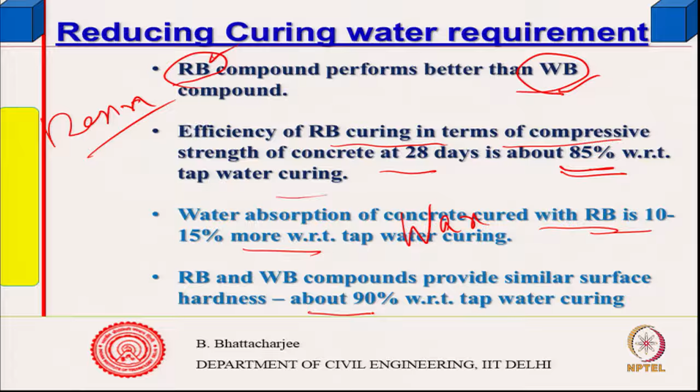Water absorption of concrete with resin based curing is 10 to 15% more with respect to tap water curing, and wax based compound provides good surface hardness, because locally the water cement ratio, the water tends not to evaporate out, it is contained at the boundary, but this is already after setting. So the overall water cement ratio or structure change is not occurring, and generally the surface is improved significantly if you use this kind of treatment.

One thing one must see, these are something like additions, these are the kind of material which you see. Now there is one more thing you should see.

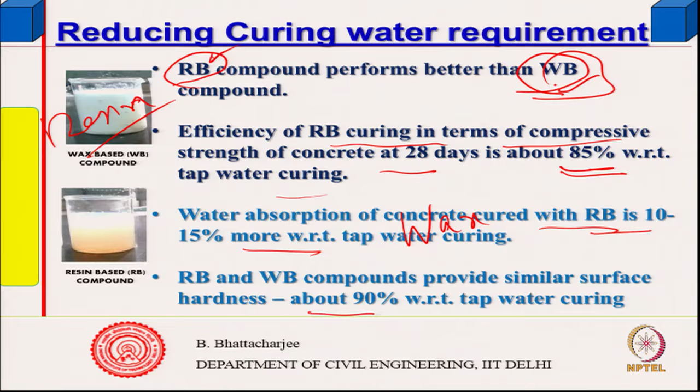When you are using this, you must see that it is able to withstand the ambient temperature. For example, in summer time, in tropical climates, even in a climate like Delhi's, which is called composite monsoon climate, we have some time of the year absolutely dry, then some time with rainfall, and then winter. During the dry period the temperature goes up to about 40-45 degrees centigrade, and if radiation is falling onto the surface, it might increase by another 15 degrees centigrade, because direct radiation means direct energy coming in. So if you touch the surface, it will be hotter than the air temperature.

Under such situations, these compounds must be stable. Wax can melt away, simply peel away from the surface if it is exposed to sunlight and hot air. So in May, June, one has to be careful, and in climates like a desert one has to be careful, but in a desert water is not available anyway. So you have to design the system appropriately and choose the right kind of compound.

Treated domestic effluent gives you another advantage, that is reuse of the water that is available. So for both concrete mixing and curing, you can use treated domestic water.

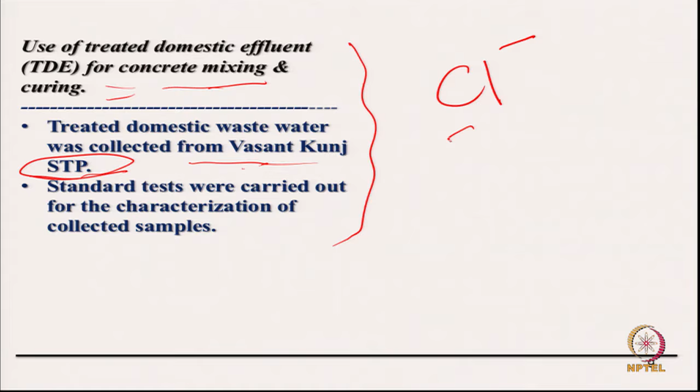Drinking water, potable water, is not necessary for concreting. The human body gets affected by bacteria, and small quantities of bacteria do not affect the concrete, but concrete is affected by SO3, SO4, etc., or particulate matter.

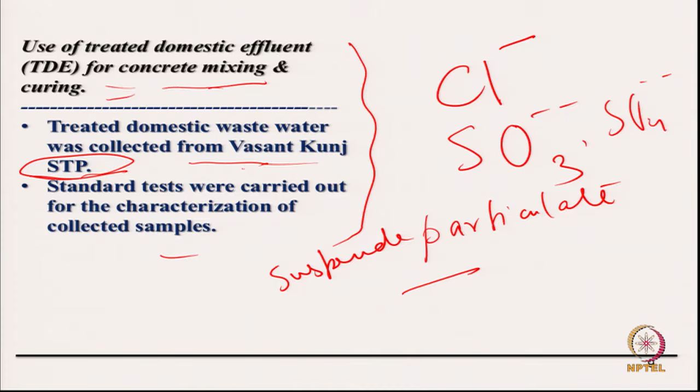Suspended particulate matter, and these are given in standards, whether you take American Society of Testing Materials, Indian standard, or any standard, you will get this standard. So first you have to test whether they satisfy those requirements or not.

If you test them, just as a comparison in a particular case, the parameters are total solids, suspended matter, inorganic solid, organic solid, pH. These are all in milligrams per liter as shown. This is an example, similar things could be there elsewhere: total alkalinity, total acidity, chloride concentration, sulphate concentration.

And the total solid should be less than a limit available as far as ASTM is concerned. This is just an example, but that is not important. The TDS limit is something like 50,000 milligrams per liter, it should be less than that.

Now, chloride content is given by IS 456, BSEN, ASTM, everybody gives this chloride content, and 500 milligram per liter is one of the limits. You will find ASTM C1602, BSEN 1008, and IS 456 of course gives you limits. So you have to see whatever code you are using, it must satisfy those limits.

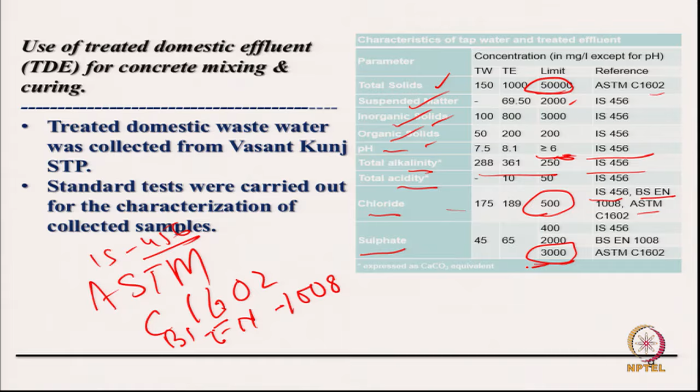Similarly, sulphates are the other one. These values are again given, and they are not all same; different codes have different values. So it must satisfy this requirement, and once satisfied, the test has been done. For example, this is a manually collected scenario, and one can collect this. So the standards are ASTM 1602, BSEN 1008, and Indian standard 456 - American, European and Indian respectively. You can look into this and they must satisfy these requirements.

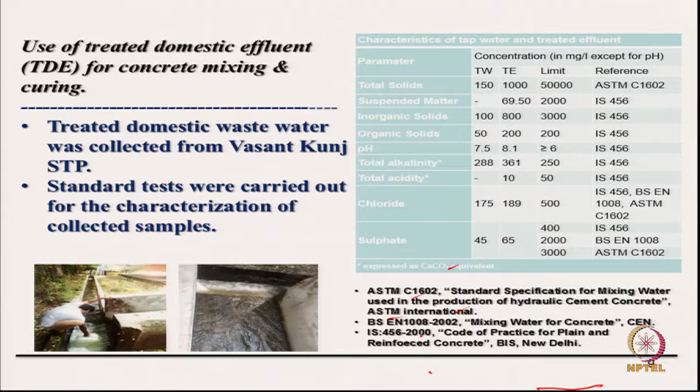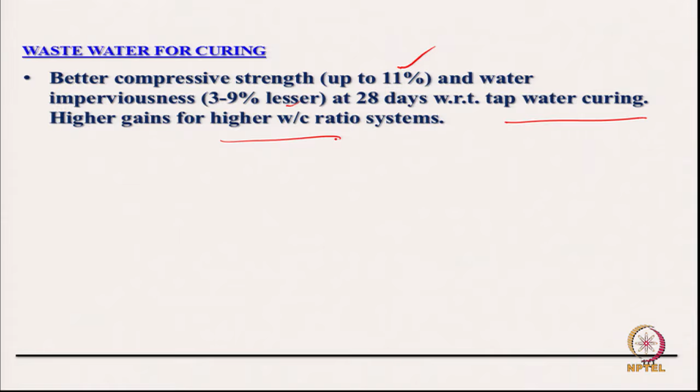Once they satisfy this, you can get sometimes better compressive strength, and water imperviousness also at the surface, with respect to some local tap water curing. So higher strength gain could be even higher, better strength for concrete skin.

If one tests them through various kinds of testing, it is possible to test only the skin performance through something like surface hardness tests, doing what is called a Capo test at the surface - cut and pull out test. So there are various tests available. You can actually find out the property of surface concrete, while your standard specimen is a cube specimen.

Cube test might be similar, cube strength must be similar, but surface concrete you find that might be different - it is important from durability point of view. So that is what it is, and then you can find, this is one example empirical result. Somebody might say no, this is not there, but it would not be a large variation.

What we are trying to point out is that treated domestic waste you can always use - treated effluent you can use, collected from STP you can use. So treated domestic effluent and 28 days strength etc. are better. So this is one case.

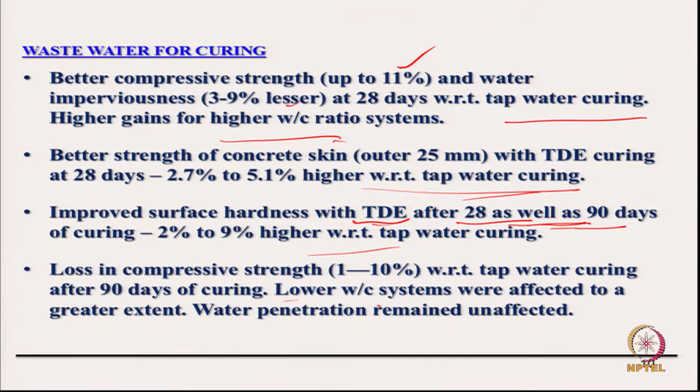Water penetration or all other properties, if you look at it, concrete might show better results. This is what is called a Capo test, cut from the surface. And if you look at water cement ratio, mixing water, this gives an example.

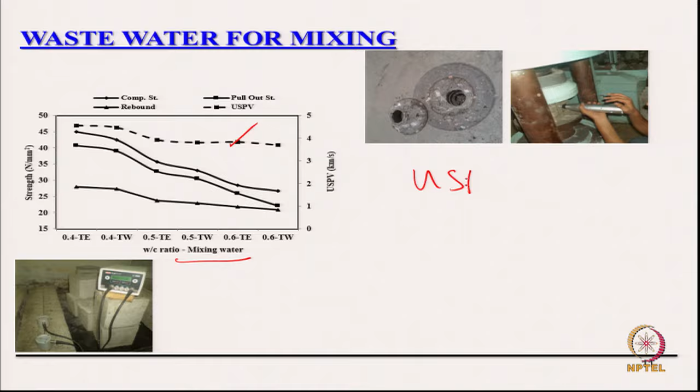Ultrasound pulse velocity - velocity of mechanical waves is proportional to the square root of E by rho. Velocity of mechanical wave in a solid media is proportional to bulk modulus divided by density.

In fact, the formula is straightforward, but I do not think I need to go into how, because when mechanical wave travels in a solid medium, there is compression and rarefaction. Therefore that would be related to the stress, and the deformation is strain. So sound pressure or mechanical wave pressure is the stress, deformation is strain. So it gets related to bulk modulus, and it is related to density because acceleration is mass, force is pressure also. So velocity, half rho v square will be the energy.

So ultrasonic pulse velocity - we do not use sonic range, we use ultrasonic, because of dimensional issues, wavelength issues. Velocity of mechanical wave in concrete would be of the order around 4500 meter per second, and dimensions of the specimens matter - at least one wavelength must be contained within the aggregate, the largest aggregate, and there should not be other phenomena occurring, like diffraction.

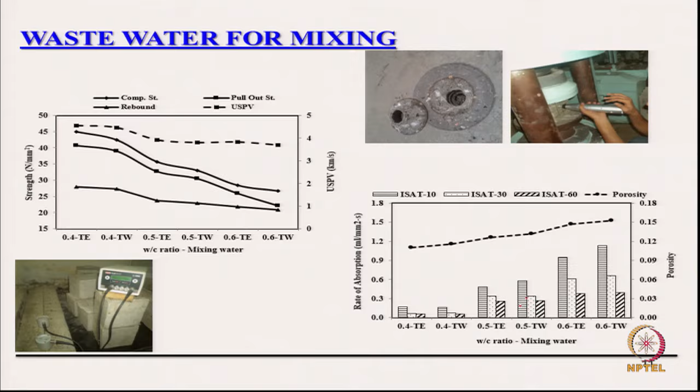Because tap water would quite often be treated, similarly various other properties like initial surface absorption test, that is a measure for durability, and you will find that the treated domestic effluent does not give you worse results.

Only one thing you see, there are different processes of treatment. The one which has got H2S, there are different processes - the process should not have toxic gases, or material content which are toxic to the concrete system. For example, if you have H2S present in the treated water, making it sulfuric acid or something, such thing should not be there. Therefore, you can use treated domestic effluent as long as they satisfy the standard water requirement.

Bacteria is not an issue, total organic content is an issue. All right, so this was related to use of treated water. That way you can cut down on the water consumption, both for curing as well as mixing.

One approach is to use the curing compound at the surface, that will cut down on your curing water. Superplasticizer, plasticizer, hyperplasticizer, water reducing agents - that will cut down your water, can cut down your cement also. The third approach is to use treated domestic effluent, as long as the water quality satisfies the requirement of standard codes, they do not seem to create any problem. So you have choices of using all of them, whichever is appropriate.

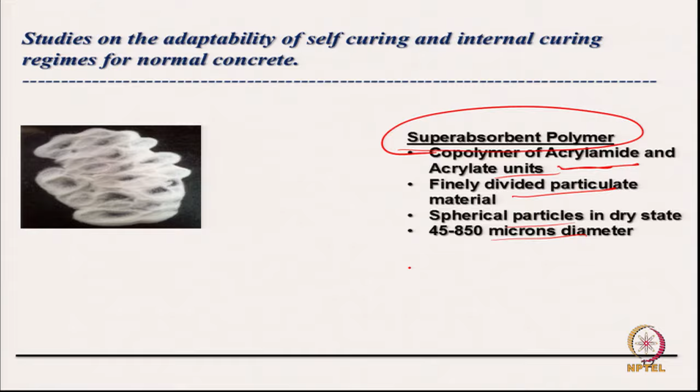So this super absorbent polymer is one of those admixtures which can be added to the cement based system or concrete system to reduce down the curing water. So that you have added right in the beginning, later on you may do or may not do. So these are copolymers of acrylamide and acrylate units, finely divided particulate material, generally spherical in dry state, 45 to 850 microns in diameter, would look something like this. And other types are there, polyethylene glycol, this is another one.

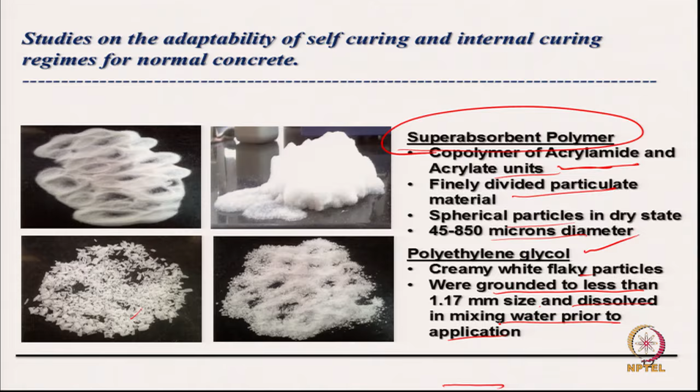So this also does the same thing, it holds on to the water and releases it later on. So you add this to the concrete system right at the beginning time of mixing, and this is a creamy white flaky particle, ground to less than 1.17 millimeter size and dissolved in mixing water prior to application. So you just dissolve it, and that too will not do the job as good as possibly water curing, but definitely does a sufficiently good job to cut down on your water use. So increasing SAP doses results in stiffening of cement paste, and hence increases water demand.

Sometimes the SAP, that is super absorbing polymer, absorbs too much water. This disturbs the setting process and stiffens it quickly. So cement paste and hence initial water demand might increase for a given consistency. Polyethylene glycol does not have this effect.

Initial and final setting time increase with increasing SAP and PEG. So initial setting time increases a little bit, which means the solidification process is delayed a little bit.

Now, what is the difference between initial setting and final setting? Initial setting is when it has achieved such a state that if you disturb it anymore, its properties would be damaged. So it has not fully solidified, but has formed a solid structure from the plastic state that it was.

Final setting means it has become a stable solid with a definite shape and, by and large, the volume as well, because there can be some contraction, so that you can remove the side support, the side shuttering, the side formwork. So final setting is that.

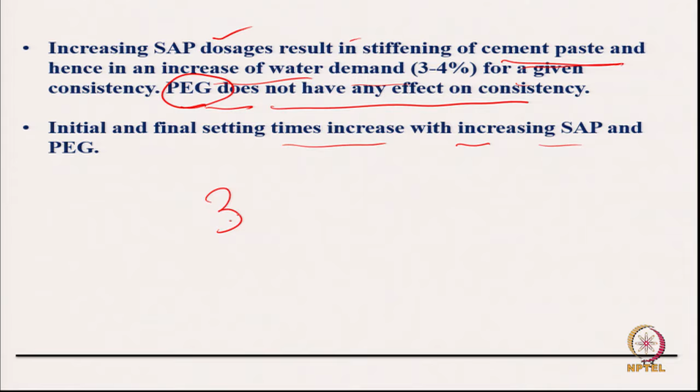Now usually cements will have a minimum setting time specified of 30 minutes, because you want to work, compact, put it into the mold and compact it within that period of time. So it is specified as a minimum. If I have 100 minutes, it does not matter - I will have more time to actually compact and place it, but 30 minutes is the minimum for all cements.

And final setting time, when I should be able to remove the side formwork, that is 10 hours. So my initial setting time should be more than this minimum, and the final setting time should be less than 10 hours.

Most of the cements, what you will find is, the initial setting time is much higher, going to even 90 minutes or so, and the final setting should be about 3 to 4 hours, not even close to 10 hours. Now these are measured by an empirical test called the Vicat apparatus - I will not go into that - or by penetration resistance tests, etc.

Now what does this do? This increases the initial setting time. So if it was about 45-50 minutes, now it will go to 90 minutes - I have no problem. It increases the final setting time. As long as that final setting time is not more than 10 hours, I have no problem. Many cements will have 3 to 4 hours, so let it increase a little bit, but you have to check that it does not increase beyond 10 hours, otherwise you will have issues of demolding.

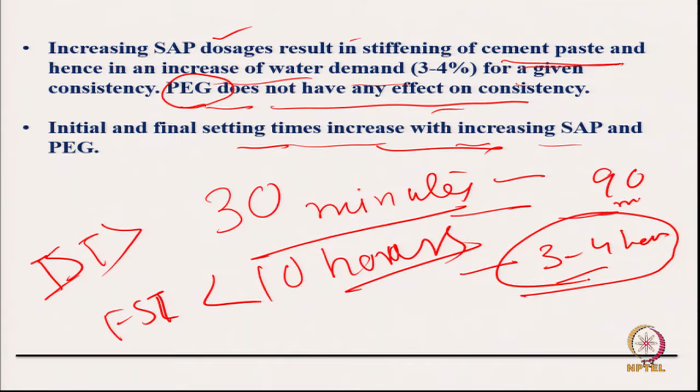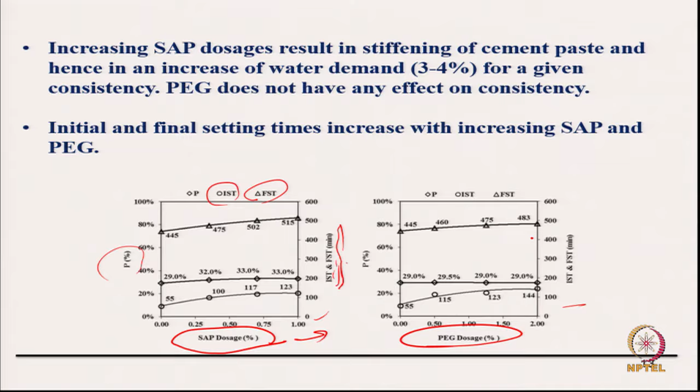Compressive strength of mortar specimens increases with SAP doses. SAP action becomes eminent after 3 days of curing age. Higher SAP doses with finer size are expected to perform better. So compressive strength - there is no significant adverse effect, that is what we are saying.

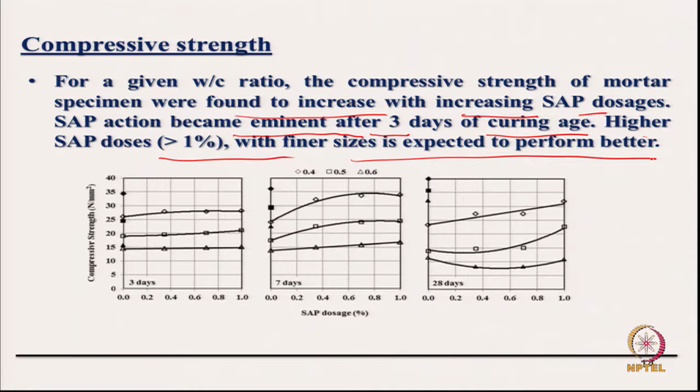And PEG, in low proportions of cement, resulted in strength and water tightness comparable to water cured samples. For higher dosage at later ages, loss of strength is recorded, so you have to be careful. You have to know that PEG can cause loss of strength as well. In other words, one has to verify these materials before using them, so you need an engineered material design system where in the laboratory you first test them and make sure things are all right, then only you do it.

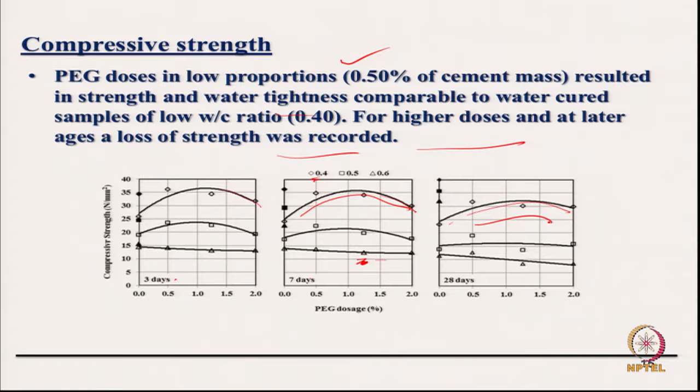So you can see that strength increases, and there is a reduction at different water cement ratios - this is 7 days, this is 3 days. This is PEG doses at different water cement ratios. In high water cement ratio, there is no problem. In the lower water cement ratio, this reduction is observed. So they can be used, but after proper verification.

The maximum dosage of SAP could be of the order of 0.32% for subsequent cases, so you can optimize them and find out what is the best. Minimum and maximum doses for acceptable performance in consistency, mortar, etc. should first be found out. A molality of 0.4 was the upper limit of PEG concentration we are talking of.

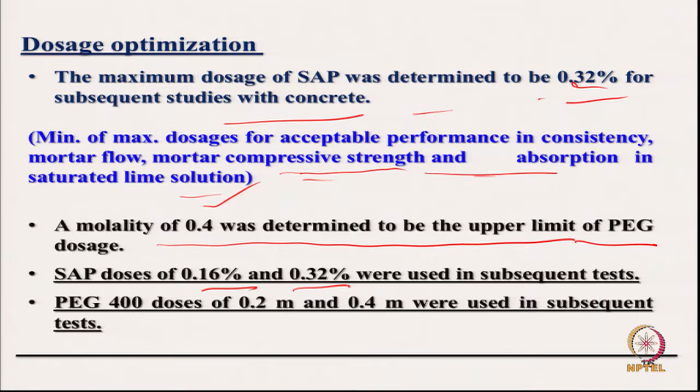SAP doses of 0.16 were used, okay, that is all right. So, some more results are available.

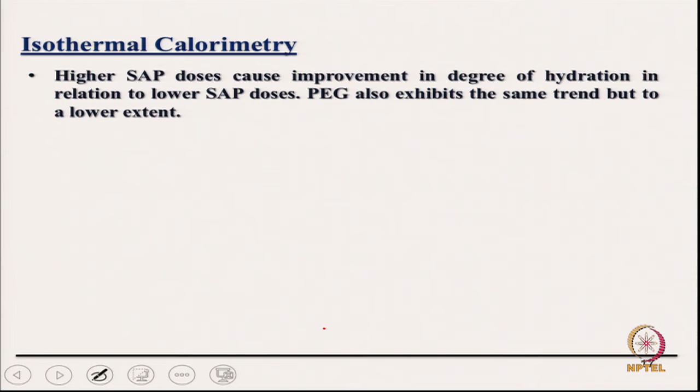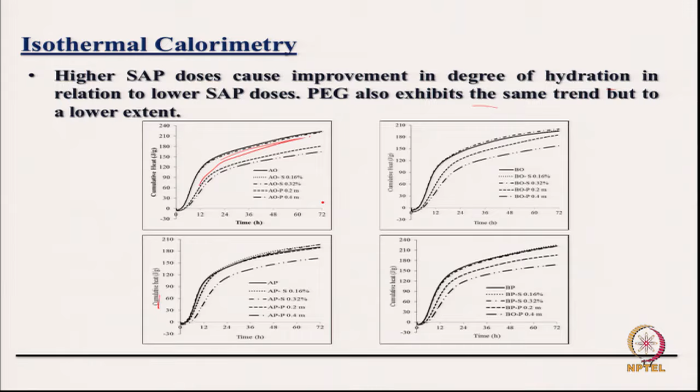If you look at calorimetry, which you use to find out heat of hydration, that would tell us the heat of hydration for various cases. It exhibits the same trend, but it does cause improvement in degree of hydration in relation to lower. So calorimetry gives you an idea related to degree of hydration, because of heat release. The heat release rate, if you see various cases, shows a similar trend, and the degree of hydration improves a little bit with this kind of material.

Similarly, moisture transport, if you look at it, durability issues are there. Higher SAP doses lead to better water retention, and mortar specimen efficiency is better at lower water cement ratios. PEG in low amount improves water retention in low water, high doses meaning the same thing as we have seen in strength. So dosage has to be optimized. Water absorption reduced with age with higher doses of PEG, indicating densification. For mixes incorporating SAP, water absorption results were not truly indicative of open porosity, owing to the rehydration, etc.

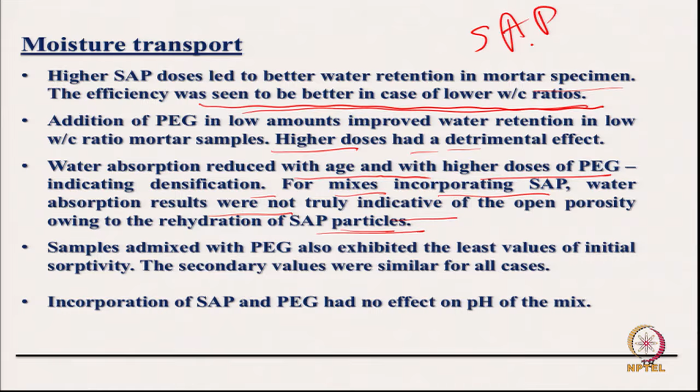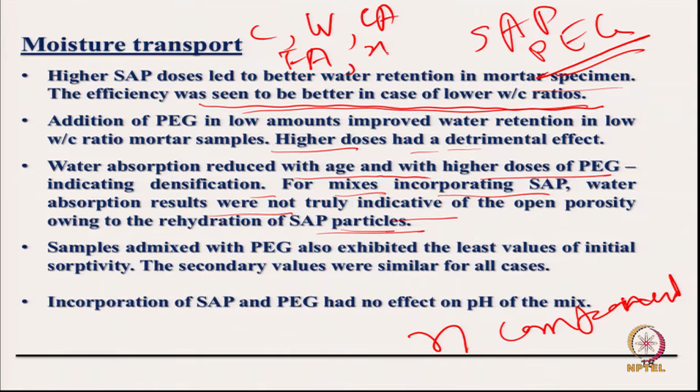So the point for your class that I would suggest is essentially that these materials are available, super absorbent polymers or PEGs, which are curing admixtures. You've got to use them, as we said, the dosage has to be optimized, all properties have to be checked before using, because this has not come to such a level that you can use it without care. So it has to be an engineered concrete. That is why I was talking about the N component of concrete, not 4, N component: cement, water, coarse aggregate, fine aggregate, X1, X2, etc. Different varieties of admixtures are possible, and you have to design the system for sustainability and for the performance that you require.

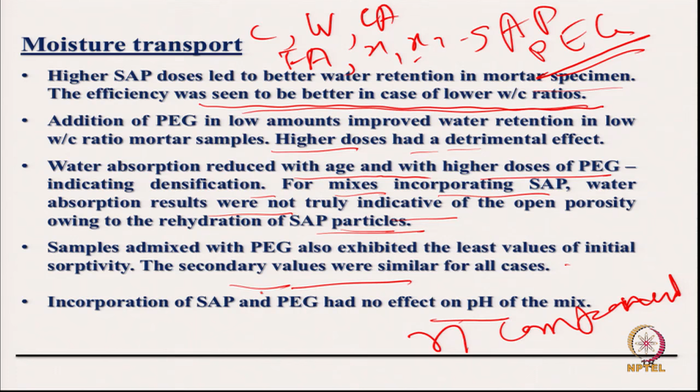pH of the mix does not change, because that has something to do with durability, least initial sorptivity, etc. So durability, some durability properties show proper improvement.

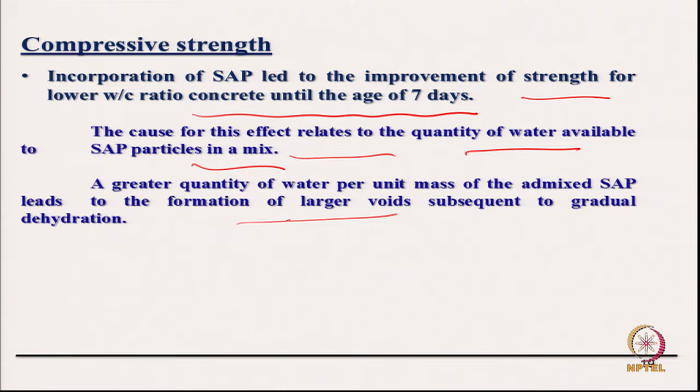There is improvement in strength for lower water cement ratio at 7 days, but beyond that it reduces. The cause for this effect relates to the quantity of water available to SAP particles in a mix. A greater quantity of water per unit mass of the admixed SAP leads to formation of larger voids. These are details, but I think I have made my point already, that incorporation causes some loss of strength in the long run with SAP.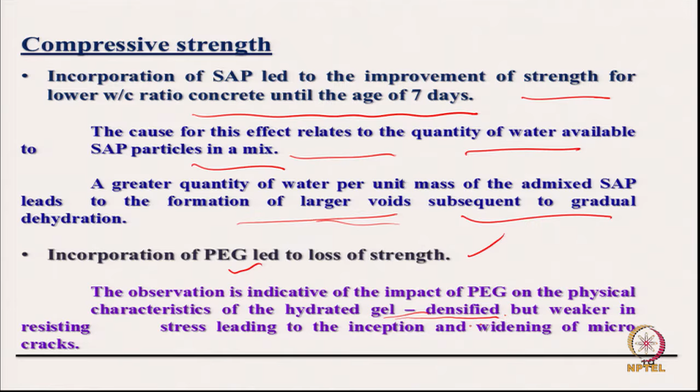One can look into the microstructures and things like that. So there is a possibility of using all those.

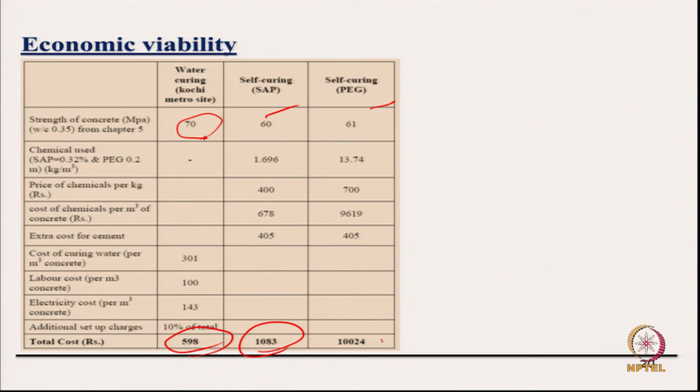If you see the economics part of it, one can find out the cost, because this itself has got some amount of cost implication. Total cost of concrete one can calculate for the similar strength of concrete. You will find, if you take a practical concrete used in Kochi Metro, that with self curing, the cost increases significantly. So it was per meter cube, total cost, and with self curing the cost increase is very much there. The amount of excess cement required for lower water cement ratio, if you want to get the same strength, also increases the cost of cement.

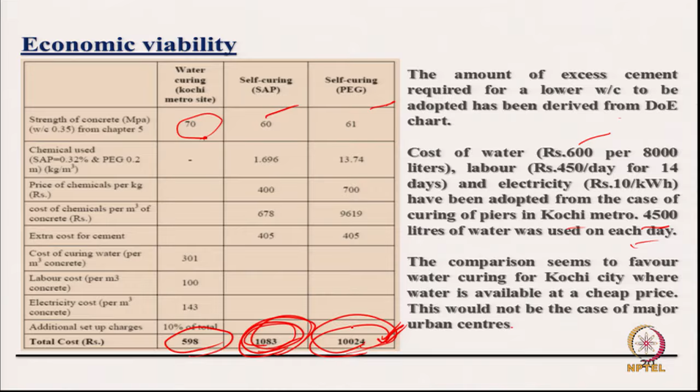So you have to see what is more important here with curing admixtures: the cost for the particular case we looked into for Kochi Metro, because to get the same strength at lower water cement ratio, strength gets reduced, so I might use more cement and the cost increases with this kind of material. For the same strength, cost increases. So you have to see the economics part of it if you are using this, but these options remain, and possibly more research would show that economically one can use these admixtures. They have their advantages where water is absolutely scarce, one might try to use them. Where water scarcity is not so much, rather the problem is the cost of cement will increase if you want a high strength system. In a low strength system, you can still use this.

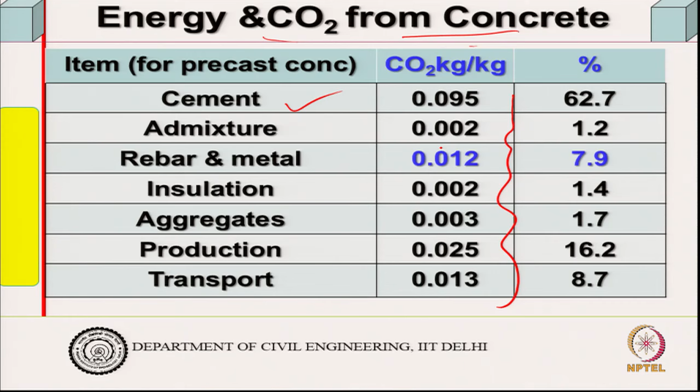So, if you see the different construction of precast concrete, energy and carbon dioxide from the concrete system, I think we will look into this in the next class. Rebar and metal, just the quantity of carbon dioxide, that is what it comes to. So from the production process, we will look into this in the next class.

We will look into it. At this stage, I think we will stop here, and if you have any questions, we would like to answer them.